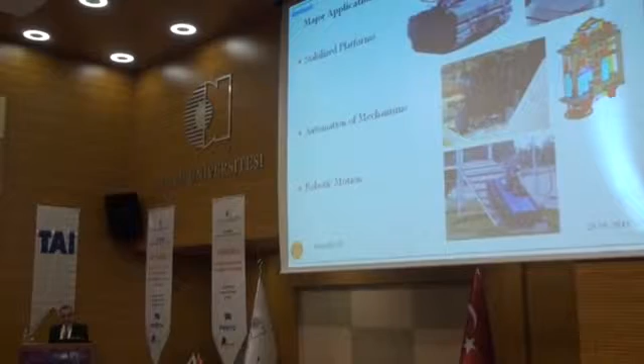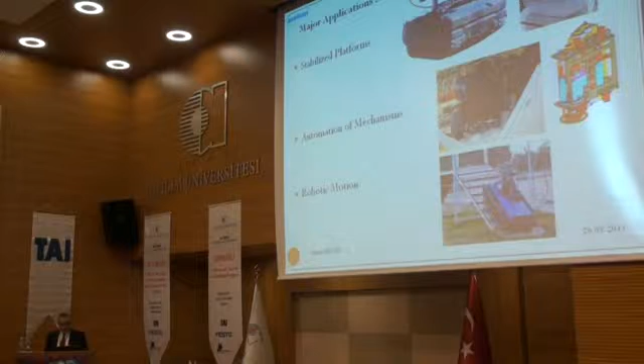As I said, in the defense industry, we can categorize the products and systems, mechatronic-wise, of course, in three major groups. They are stabilized platforms. Here you see a single weapon platform or an optical platform. The others are some complex mechanisms, and the main task is to realize these mechanisms and automation of these mechanisms. And another area is robotics and robotics motion, of course.

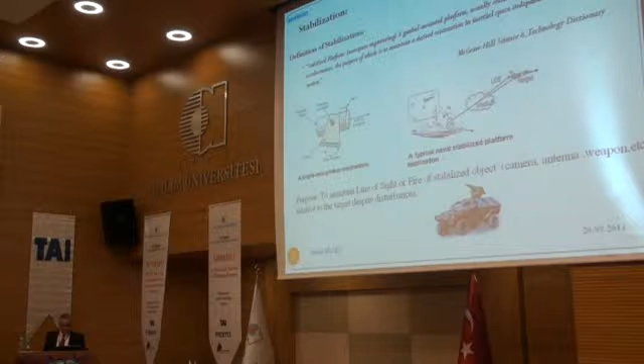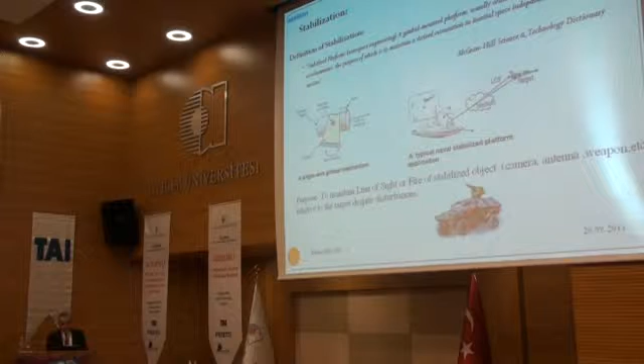What stabilization is, I take here the explanation from the McGraw-Hill Science & Technology Dictionary: a gimbal-mounted platform usually containing gyros and accelerometers, the purpose of which is to maintain a desired orientation in inertial space independent of the craft motion. Here you see a gimbal system. It includes gyros and some sensors on it, and there is a stabilized object, and with the help of the motors and bearings you try to align it to the target.

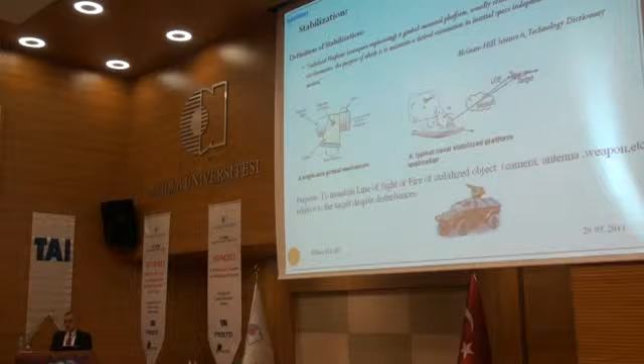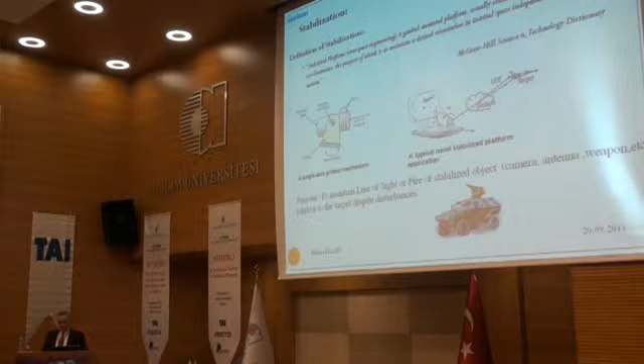Even if it's on a sea platform, in a ship, or on a ground platform, your aim is to keep the line of sight of the stabilized object at the target, irrespective of the disturbances caused by the waves, ground, and motion of the platform. The stabilized object is mostly an antenna, camera, weapon, or a radar in defense industry.

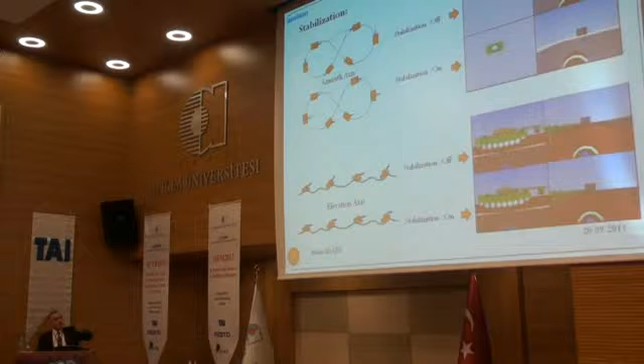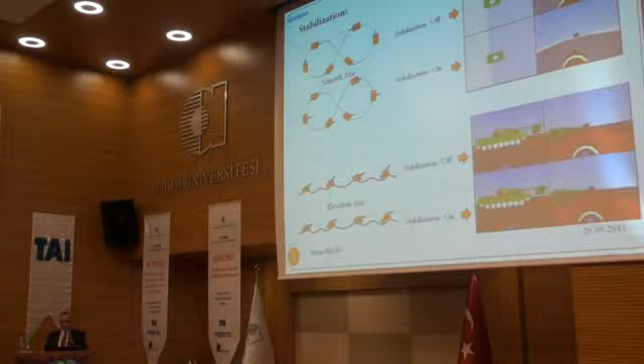So you see a simulation of a stabilization application. Here the tank moves in a curvy manner. At the top you see the gun moves with the curvy movement of the tank, but just below you see the gun is stabilized, and you always aim just at the center of the target with the help of stabilization. So how do we realize these stabilized platforms and other mechatronic platforms?

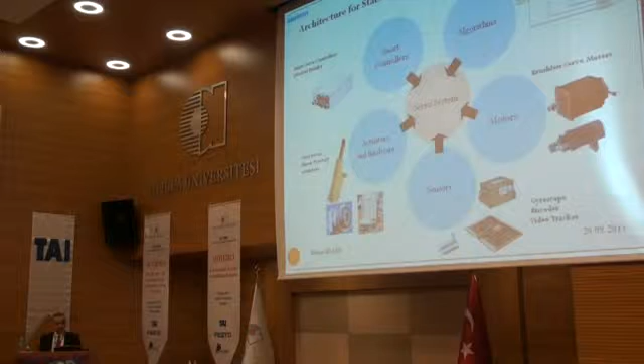We can represent it with 5 building blocks. Let me make an analogy to understand it better. If you need a robot or a structure, you first have to design the structure or the skeleton of the robot. Then you need to put a brain on it. If we can make an analogy with the brain, like smart controllers.

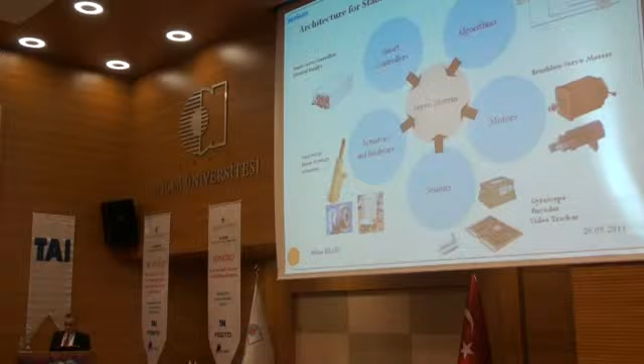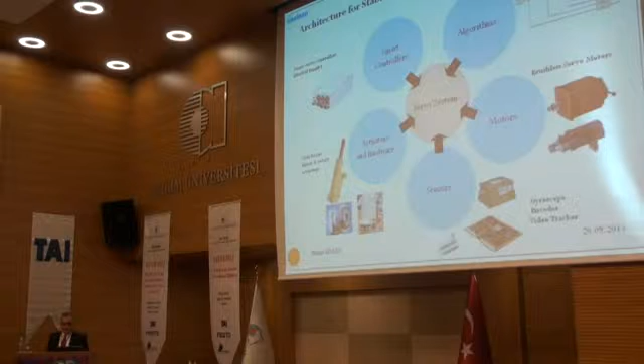And you need some sensors, eyes or ears. There are gyroscopes, encoders, and some other critical hardware. So the outputs you take from the outer world are the inputs to the brain, and you evaluate and decide accordingly. You realize these with algorithms in the brain, and you need actuation. You need muscles. These muscles are motors or actuators.

And in our company, we try to design each of these building blocks to have the flexibility of getting smart systems. So the more you are good at these sub-building blocks, the more the probability you will get a smart system solution. So we try to design our sub-building blocks.

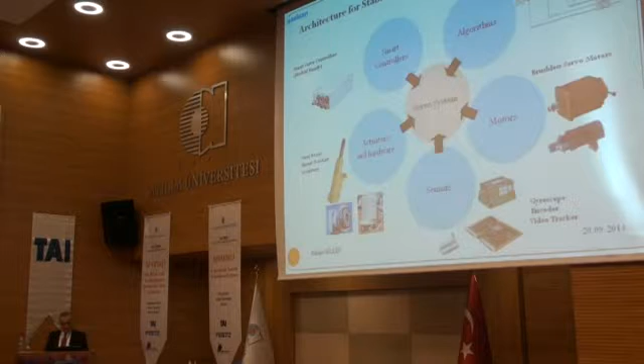So you see a family of smart drivers. We say it's smart because not only do they drive motors smartly, but they also evaluate the sensors from the system. I mean, the gyroscopes or encoders are directly connected to these units with the DSP, digital signal processing board, or CPU board infrastructure. These units evaluate the required signals according to the algorithms run on them, and they accordingly react to the motors to get the units stabilized.

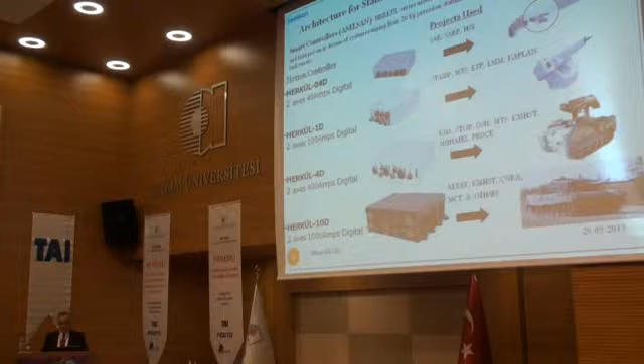We use them in air applications, in naval applications, even in big tank applications. In the national tank, Altay, we use the electrical drive units of this family.

For the algorithm sub-block, we have many different versions of algorithms. Some I didn't even include here. For robotics, we have different algorithms, but for the stabilized platform, we can categorize them in 2 major groups. They are stabilization control algorithms and automatic target tracking algorithms, which we realize with our own hardware.

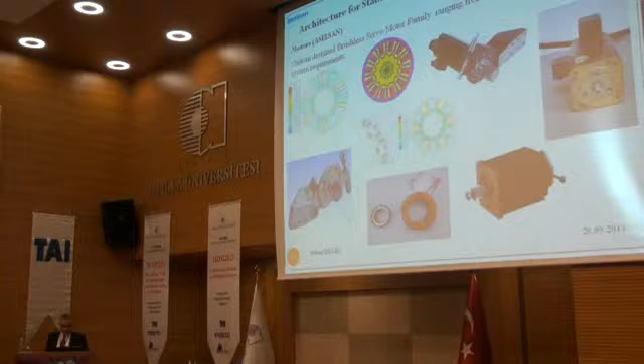And we have also designed our motors for these applications. We have a range of brushless DC motors. They are military, of course. We use them in our designs. And for the sensors and actuators, we have packaged and qualified a military gyroscope. We mostly use these ones in our designs, and we have designed a video tracker board which detects and tracks the targets in real time.

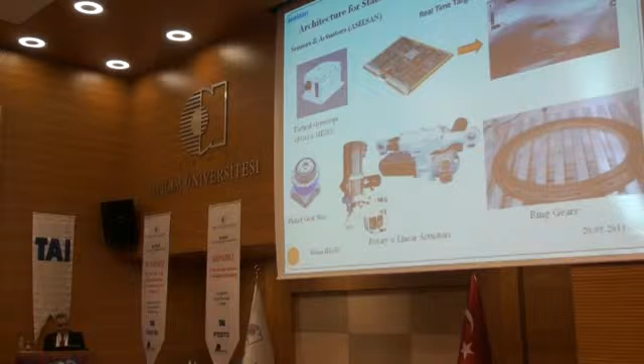And in the row below, you see some, let me say, dynamic mechanical units. They are planetary gearboxes, rotary and linear actuators, and ring gear. We are also working on the design of these units. By design, I mean beginning from the subcomponents and analysis, thermal analysis, magnetic analysis, and we end up with the specific unit that we need.

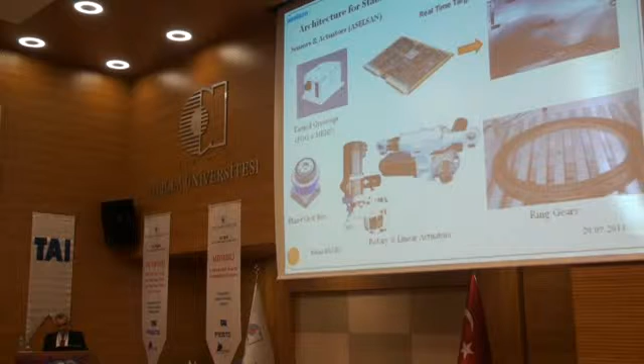So we put sensors on the real system, for example, a naval ship or a ground vehicle. We take all the disturbance data and play it in laboratory conditions to realize the field disturbances. So we accordingly check and develop our algorithms with the help of these Stewart platforms.

Also, we widely use a motor test setup, and we dynamically load the motors we designed with the drivers. So we see the dynamic performance of the motors and drivers, their heat characteristics, their torque-speed characteristics, in every detail before we put the motors and drivers on the system. We conduct tests at this level also.

So when we say tests, we have different tests at different levels. We conduct tests at board level, unit level. When we integrate the units on the system, we conduct integration tests, and later environmental tests. Then we go to the field and conduct field tests, and at last acceptance tests with the customers. So at each stage, we test our algorithms and our hardware according to the specs.

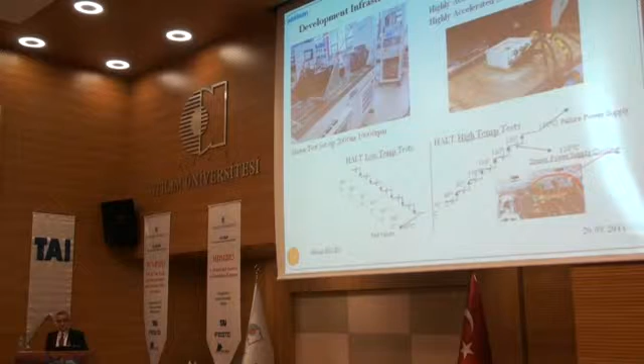But here, what I want to accentuate is that we also conduct, and it's not a common one, that's why I want to share it, highly accelerated life tests, or highly accelerated stress screening. This is a methodology, in fact, instead of a test. We go up to 120, 130 degrees for some units, to see what the first element is that fails or recovers from the failure.

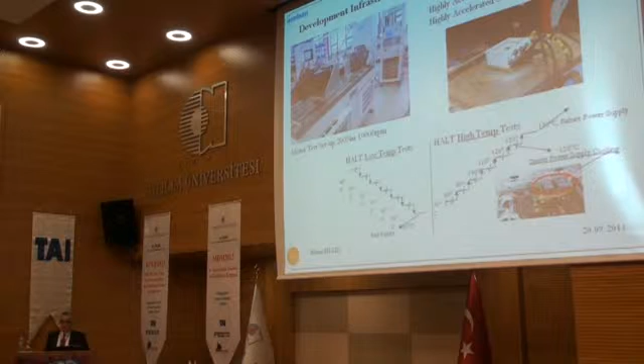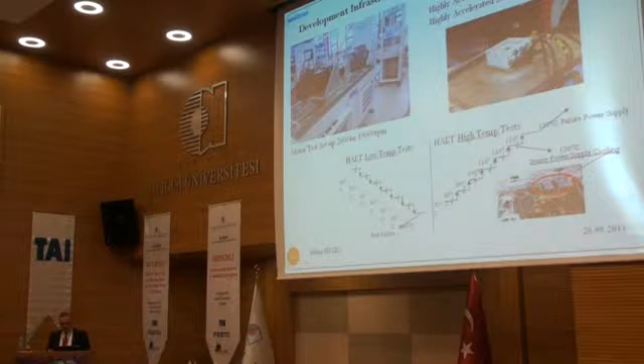Or we go below minus 90, minus 100 degrees to see the very cold temperature reaction of the hardware, and accordingly we also conduct very harsh vibration and shock tests on the units, especially on critical units.

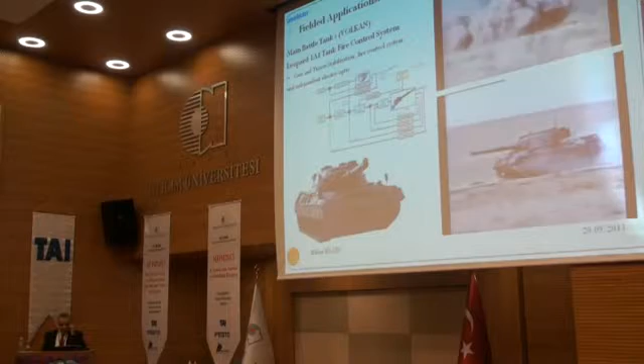So here we come to the fielded applications. Here you see a battle tank application. Here we realize a modernization project. We put in electronics and control infrastructure, and we develop control algorithms for the gun and turret stabilization and for the fire control system.

In the tank literature, there's an important issue: the hit capability at the first shot. If you cannot manage to hit the target at the first shot, you are an open target for the enemy. So in this project, we mainly increased the first hit capability of the tank.

Here you see another application. We work on Altay and Leopard 2A4. Altay is the national tank design project. Here we design all the electronics, but our group mostly the electric drive systems. I mean the motors and drivers and algorithms for the stabilization of the gun.

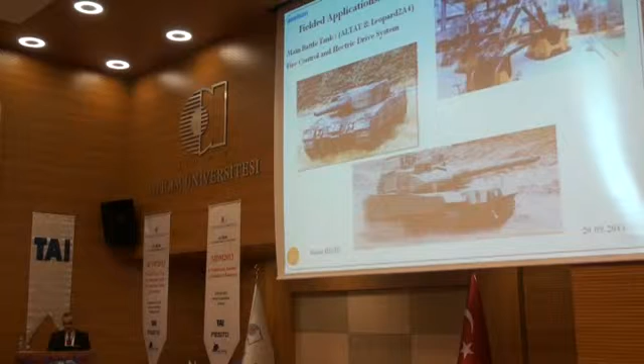Here you see an azimuth disturbance test. If it is not stabilized, the gun moves with the azimuth disturbance. But if it's stabilized, you see that the gun is kept constant, aiming at the target even under disturbance conditions.

Here there is another application. It's a missile platform. It's called pedestal-mounted Stinger platform. We realized it for the Turkish Army, and also we export it to the Netherlands Army. Here you see a test on the platform.

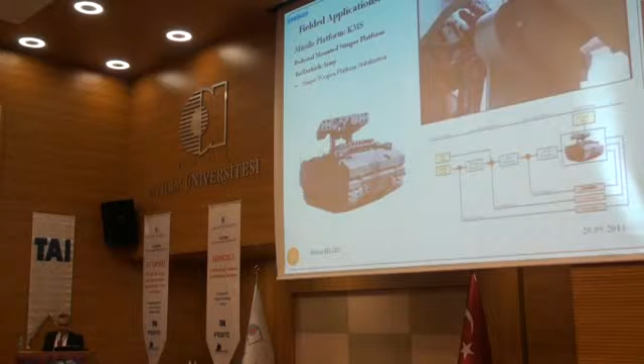There is an elevation disturbance given by the Stewart platform. The yellow platform is the test platform, and it disturbs the unit. You see the system, algorithm, and the motors react in such a way that they keep the gun fixed to the target in spite of the disturbances caused by the Stewart platform. It is fixed to the target even in the sub-milliradian range.

This is another application of mechatronics. Here it's a 12.7 millimeter gun system. We call it STAMP in short. It's a stabilized machine gun platform. We conduct field tests. We put this gun on a tracked vehicle. When the vehicle moves, of course there are disturbances, but as you see with the tracer bullets, the bullets are always on the target, irrespective of the movement of the vehicle.

In the below case, both the host environment, I mean the ship that we put the machine gun on, and the target are in motion. So we first track the target, and at the proper moment we hit the target. This is another application of the stabilization. So there's another one for another machine gun platform. There are many platforms, but I only selected some of them here.

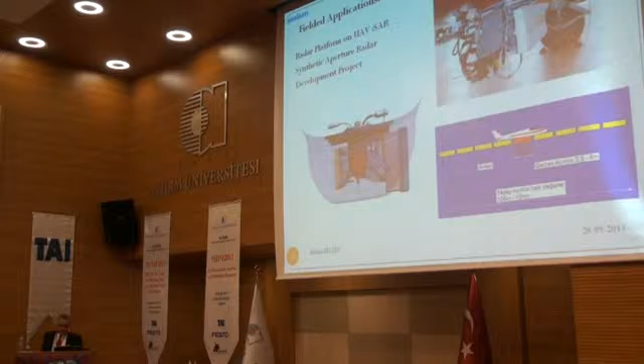If the time suffices, I will also show an extra video for this synthetic aperture radar system. It shows all the design stages of this system. Here we mostly focus on the design of an antenna system. We design the structure of the antenna. We put electronics, sensors, and actuator motors on it. It's designed for an air vehicle. We conducted its tests, and it will be integrated on a UAV system in the next stage.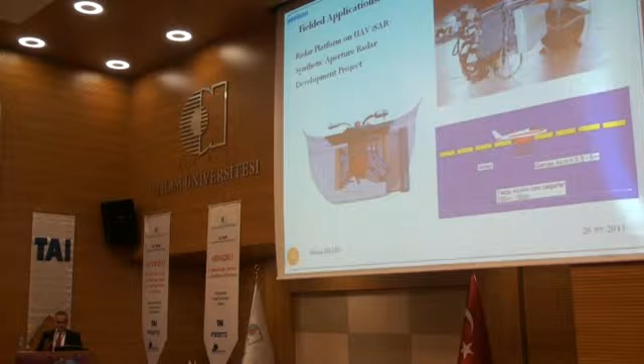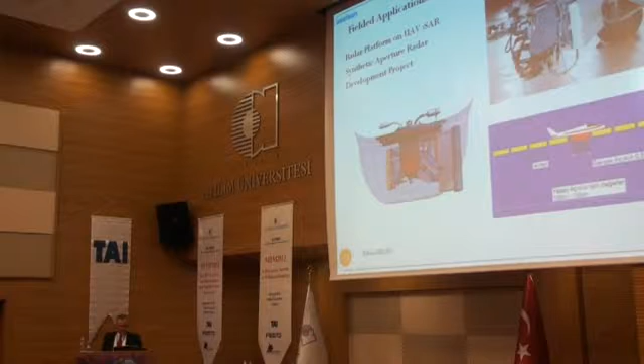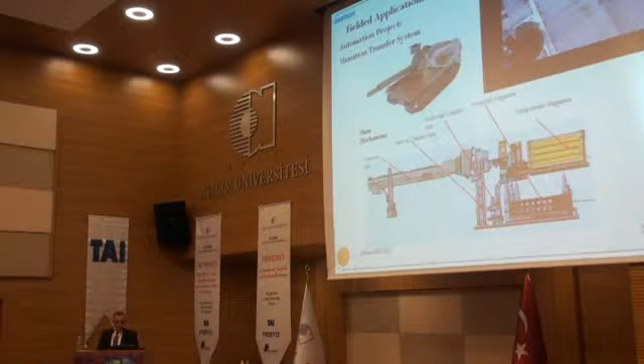Synthetic aperture radar is used to map the ground even in the worst weather conditions. So with radar principles, it evaluates the signals, detects the moving objects, and maps the ground. Now, this is not a stabilized one. We also realized some mechanism designs and automation of these mechanisms.

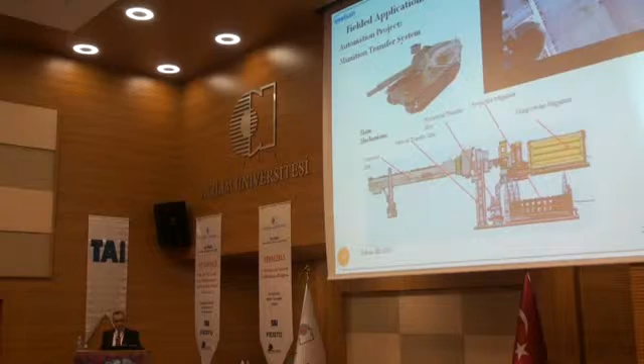For example, here you see a vehicle. The projectiles are densely stored in the vehicle, so there is no way a man can go inside and carry the projectile outside. Before, it was realized like that. With a high number of projectiles, this tracked vehicle moves to another vehicle and automatically loads these projectiles to the other vehicle.

So to realize this, let me say, mechatronic job, we use 4 different mechanisms. One turns the projectiles in a small area, making a circular movement. The other takes the projectile with the help of a hand and moves it horizontally. Another mechanism increases the elevation of the projectile and flips it, and another conveyor unit conveys the projectile to the other vehicle. And all of these mechanisms work in 2 directions. I mean, you can do loading or unloading.

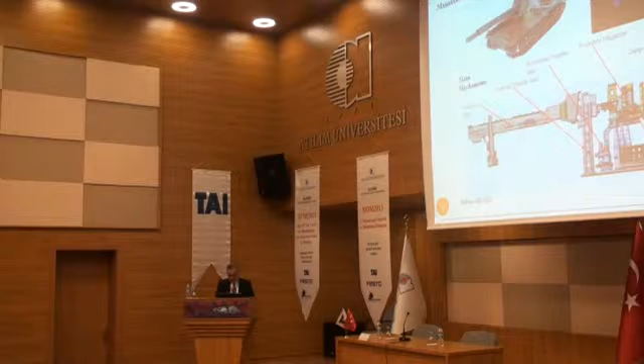So perhaps after this short information, I can replay the video. Here we design all the mechanical structure. We design our motors, we design our algorithms, we design our electronics to realize this. In fact, I say we design, but we mostly used already existing sub-building blocks.

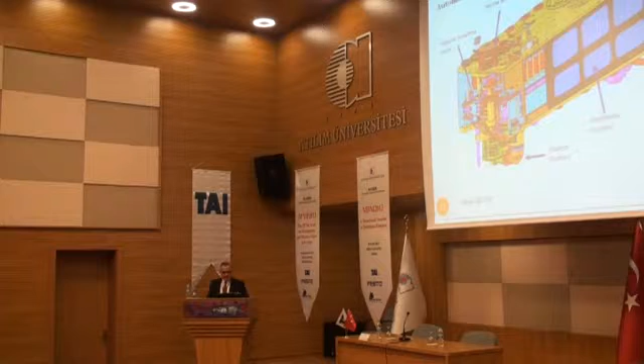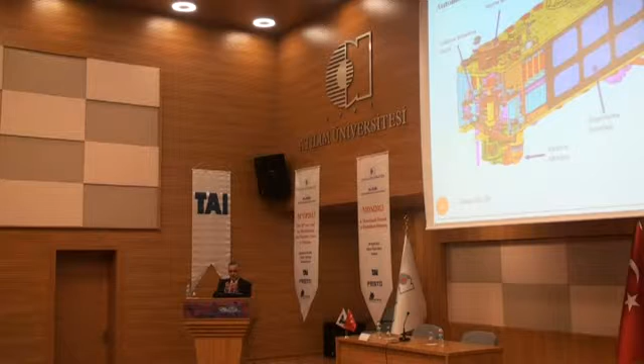This is another example of a mechanism. It's also a projectile loading system, but here the job is much tougher than the previous one, because we should load 600 projectiles in 1 minute, so the speed is very high. What's more, we load these projectiles to a gun firing on the move, and this firing regime is not regular, so we should have a mechanical buffer, a mechanical accumulator to compensate for this irregular regime.

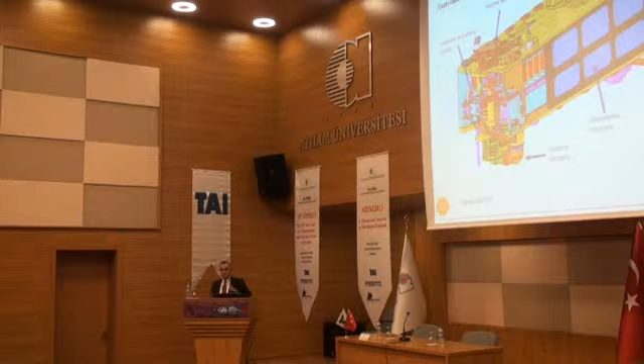So we designed an accumulator and mechanical buffer. What's more, these guns go up and down all the time to follow the target. So you should flip these projectiles and change their angle by a flexible body to load synchronously to the gun system. So it's another tough job. We worked on the design of 4 or 5 different mechanisms to realize the required job. After this brief introduction, I will show you a video of this simulation.

Now we are at the prototype test stage of this unit. You see the loading of the projectiles, and every time they are loaded, projectiles are rotated. So this speed goes up to 600 projectiles per minute. So it's a pretty high speed for this type of mechanism. You see here the accumulator, I mean the mechanical buffer; it enlarges according to the needs to include more projectiles.

Here you see the flexible structure that loads the projectiles according to the angle of the gun. Here you see a flexible body. So this mechanism can be considered a complex one. We realized the mechanical design and automation of this system also. Here you see the flexible body, which aligns the projectiles according to the angle of the gun.